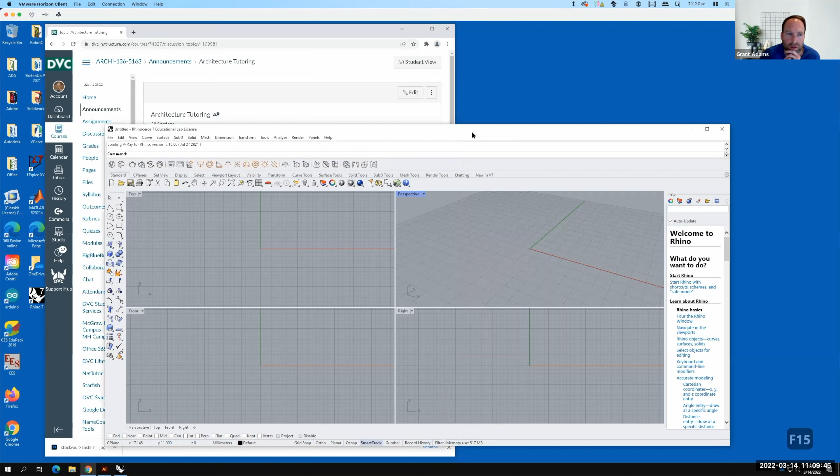Okay, so let's bring back up what we're working on today, which is 213. And this is very much finishing up what we started last class. When you're done with exercise 213, you're pretty darn close to being done with your assignment 202, which is awesome. So when you turn in your assignment 202, you're going to be turning in an AutoCAD DWG file as well as a screenshot showing your red and blue lines as part of that assignment. It should be separate, so you need to turn it in twice, essentially. You're going to have those things at the end of exercise 213, but you can then use those again for your assignment, assuming that everything worked correctly and that you finished it.

So let's start from the very beginning. Let's go all the way back into SketchUp. I'm not asking you guys to go all the way back into SketchUp. I'm doing this just for the sake of this is the whole process. So I'm gluing it all together. I'll probably cut through a few phases by opening new files so that you don't have to watch me do all the steps. But I would start by opening up SketchUp. So let's get down here into SketchUp.

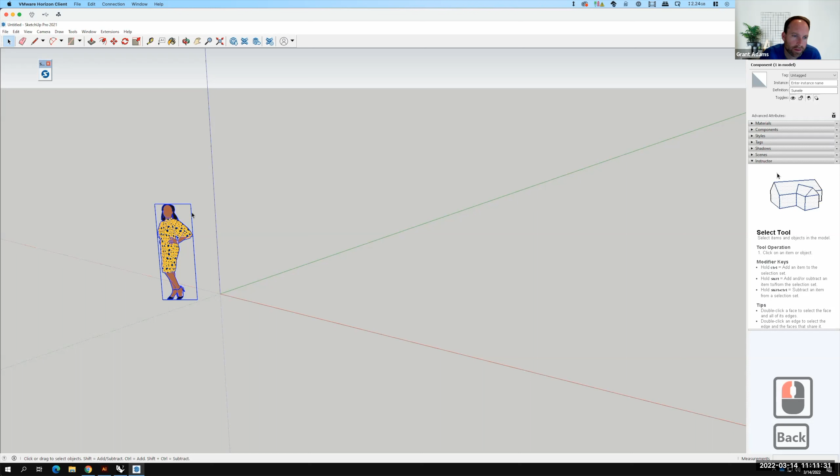And I'm going to agree to this. And we'll pick the architectural inches template. And there we are. I'm going to go ahead and delete the figure. We don't need that. And then I'm going to open up the geolocation. When I do this, it's going to ask me to log in. So I have to go in to sign in for a second. And I have to get passwords and stuff. So bear with me. Probably should have already done this.

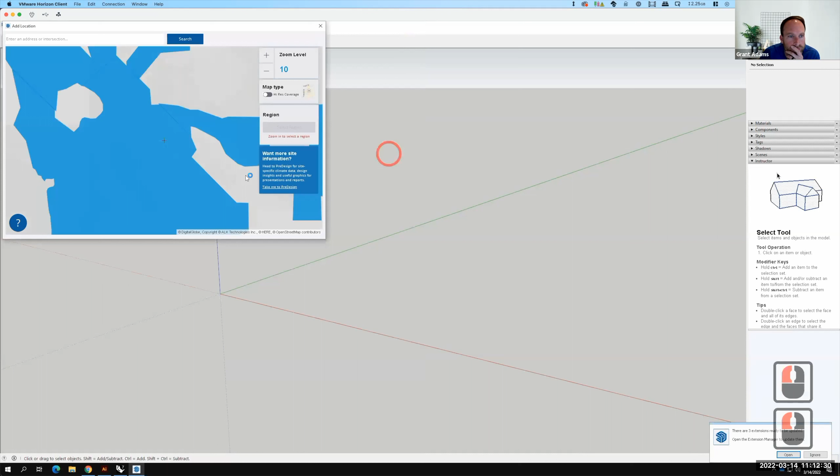All right, so I'm going to sign in with Google here. Oh, I have to accept my cookies first. All right, perfect. So now I can bring in the add location. Let's go to next here, next.

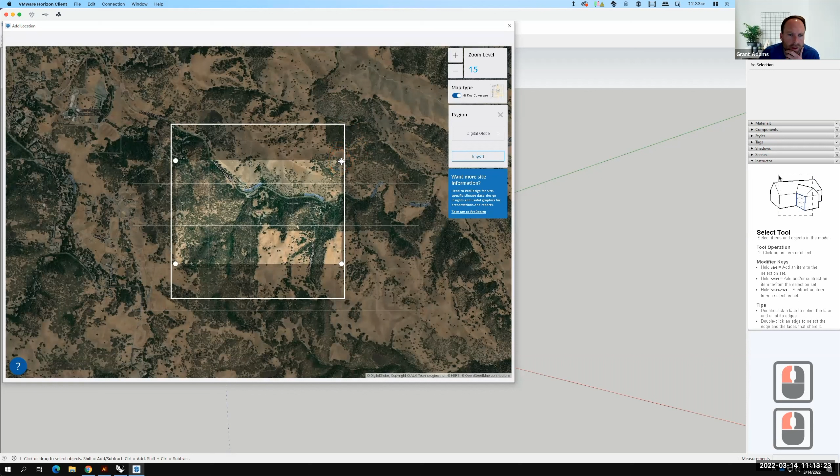Okay, so I need to start with a location. So let's see here. Maybe we can zoom in on Mount Diablo and get something from Mount Diablo here. Well, here, we'll zoom in. Remember, once I get that box, I'll be able to take a piece of terrain. So I'll go ahead and click on select region. And we're just going to use Digital Globe here. I'll select the area that I want to capture, and I'll click on import.

If I want to see that, I can go to File, Geolocation, and I can click on Show Terrain, and I should get my terrain. There it is. So I can take this terrain and I'm going to save it. I'll go to File and then Save As, and I need to back save it a few versions. So we're going to go back to SketchUp 2018, and I would put this into today's folder. This is... helps if I could type here.

And I'll click Save. And now it's saved my SketchUp file. So I can go ahead and close SketchUp. I don't need that anymore. And I'm going to bring it straight into Rhino. So I'll go to File and then Import.

I do have to make sure that my model units are correct in Rhino. Right now they're in millimeters, so that's a problem. So let's go to my unit settings and let's change my units to inches, because I need those two to match. And then I can go ahead and go to File and then Import. And we're going to import that SketchUp file that we just saved. All those default options are just fine.

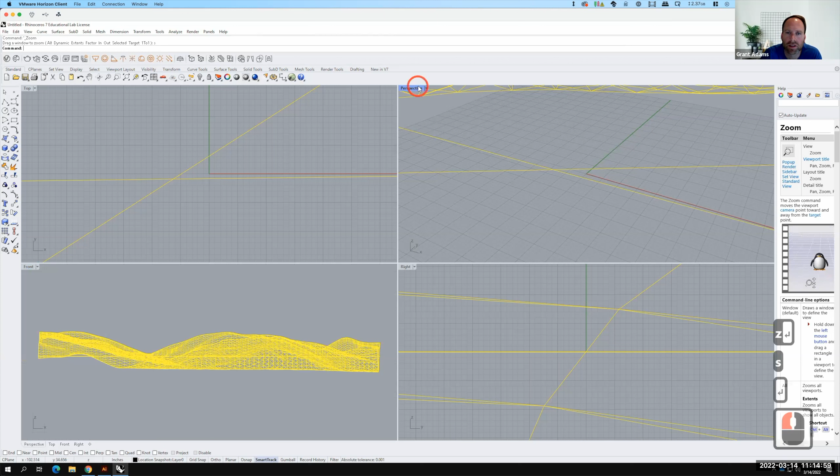Let's press Z, enter for zoom, followed by S, enter for selected. Let's do it in the perspective view here. And now we can see the whole piece. Let's do some organization. And again, I'm obviously moving a little bit faster through it this time because you've seen it twice. So I'm going to make a layer called SketchUp.

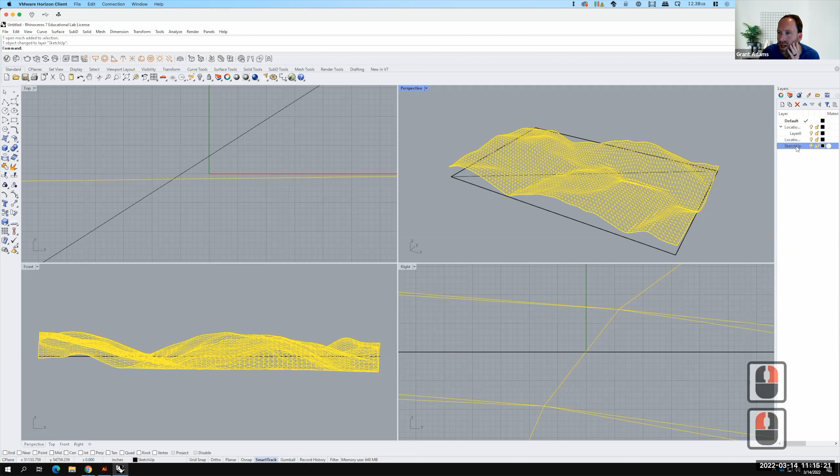And we'll take the terrain and we'll move it onto the SketchUp layer. So let me right click and say change object layer. And now that's on the SketchUp layer. We could turn it off and then we could delete the rest of the layers because we don't need any of those. So let's take those, we'll get rid of them. And we'll make the SketchUp layer active. And we could actually get rid of the default layer as well. So I now have just the mesh from SketchUp.

I'll double click on the perspective viewport to make it large. And now we need to contour this to convert this over into a NURBS surface. So I'm going to turn on my vertex snap. There it is. And I'll create a new layer for contour X. And I will then contour this mesh. So I'll type in contour or go up to Curve, Curve from Objects, Contour.

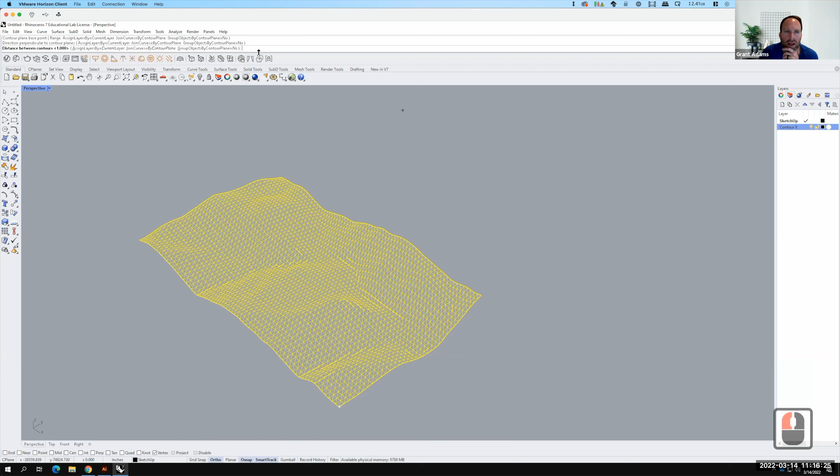I'll snap to this corner. Now I need to make sure I'm on axis. So let me turn on ortho. I'll make sure I'm on axis. I'm not snapping to anything. And we'll do my interval at 100 feet. And there it is. And that should be fairly close to what the grid is or the mesh is. Oh, I have to change those because I didn't have them on the correct layer. Let's change object layer so that they end up on the contour X layer.

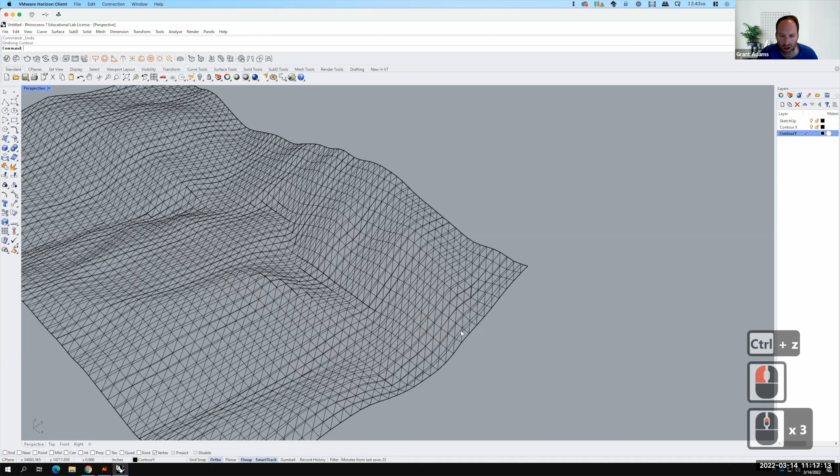Let's create another layer for contour Y. We'll make that active. And then I'll go up again to Curve, Curve from Objects, Contour. If I had done this, I'm going to end up with a bunch of points because I was contouring the lines, not the shape itself. So let me undo that, make sure I'm selected on the mesh, and then we'll repeat contour. So let me type in contour.

If I can type, there it is. And this is going to be contour in the Y. So we'll make sure we're not snapping to anything. 100 feet. And there it is. So I have contour X, contour Y. I'll turn off the SketchUp layer. And I'll look at this grid in the top view. So let me zoom selected.

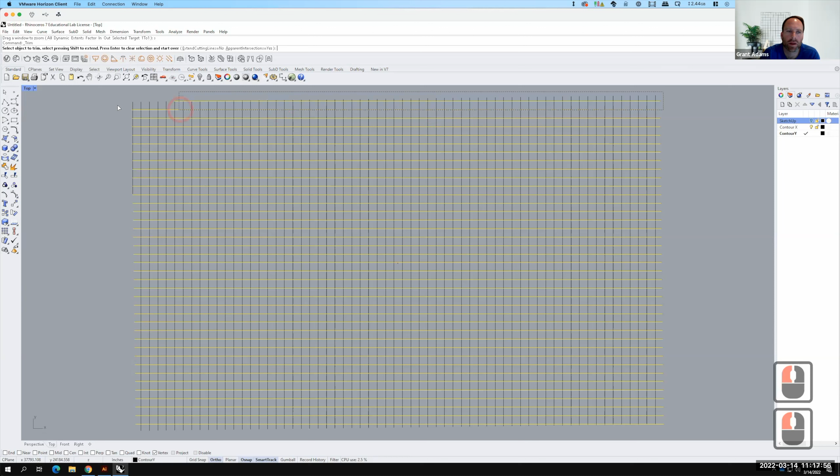We need to do some cleaning. So let's use the trim command. I'll go up to Edit and then Trim. We'll trim off all of that. Come down to the bottom and we'll trim off all of that. I'll hit enter to finish. Then I'm going to repeat the trim command for the sides, trim.

Trim that off. And then we'll trim, oops, all of this off. Perfect. So when I'm done, I should have this perfect little grid. So as I've done before, I'm going to make sure that I save this before I do my curve network. So I'll go to File and then Save. And this would go into today's folder, and we'll call this Marsh Creek. I'll go ahead and click on Save.

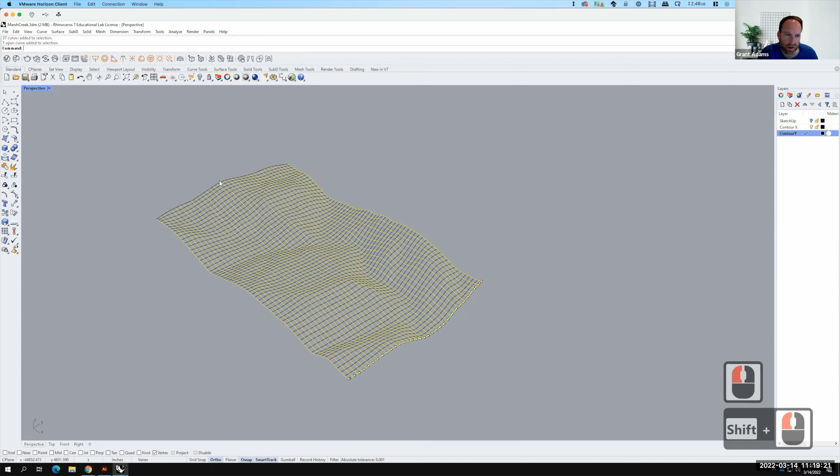And then I can do my curve network. So when I did the curve network, remember I had trouble when I did all of them. So I'll select all of the lines in one direction. Actually, let's do it with fewer. Let's select all of these. And then I'll select just the two ends. So we'll go there and we'll go there. And then we're going to do the network surface or the curve network. So it would be under Surface, Curve Network, or I could type in NetworkSrf into the command line.

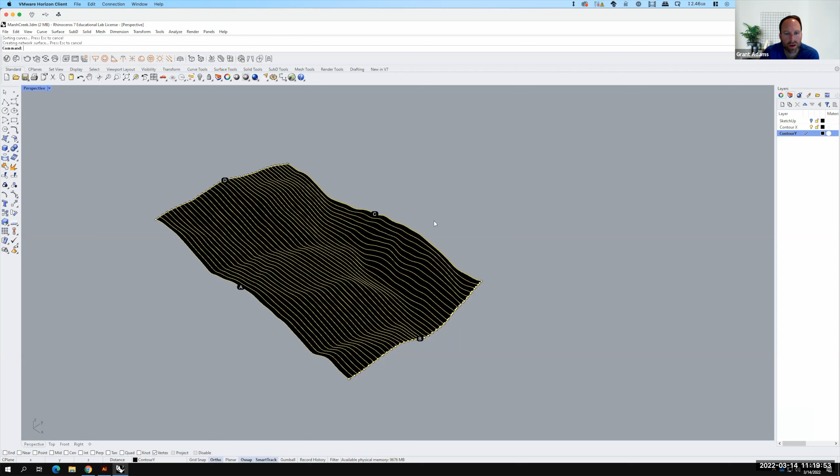It's going to give me my 4 points. Gives me a little preview. Pretty soon the dialog box should pop up here. And we'll go ahead and say OK. And this is going to take a little bit of time. While that's working, I'm going to go ahead and open up my file from last class, because once we get to the sides, I'm going to skip over. So let's go into here.

Perfect. I'm going to walk my way over into this file a little bit later. So I'm just getting that up and ready so that you won't have to watch me redo all the lines. So we'll leave that minimized for right now. It's still processing here. While that's happening, we'll start talking about the next phase because I want that to continue.

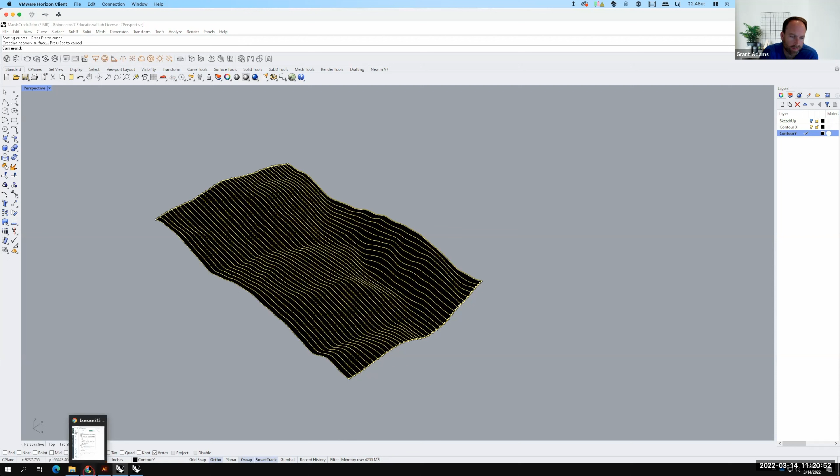So over here in our exercise 213 from last class, I had this chart right there. So this topography creation chart is beneficial for you because you can use it to determine scale and contour interval, etc. So as I talked about last class, we have over here our scale. So we have things like 1 to 200 scale, 1 to 100 scale, 1 to 50 scale. Those are all common scales at the site level. Down here, we have our architectural scales like 1/4 inch equals a foot or 1/8 inch equals a foot. Okay, so those are all allowing us to select the appropriate scale.

So the one that I did last time was 1 to 200 scale. So I'm looking at this third column down right there. And as I come across, it's going to tell me the size. And I told you that the model size that we're making is 11 by 17. So 11 inches by 17 inches at 1 to 200 scale ends up being 2,200 feet by 3,400 feet. So my overall size of this model is going to be 2,200 feet by 3,400 feet.

See if Rhino decided to catch up with me here. Good, it did. So let me rebuild this surface. And I'm going to rebuild at 100 by 100. And I'll go ahead and say, OK. As soon as I do that, this becomes a workable file again. Let's put that on its own layer called terrain.

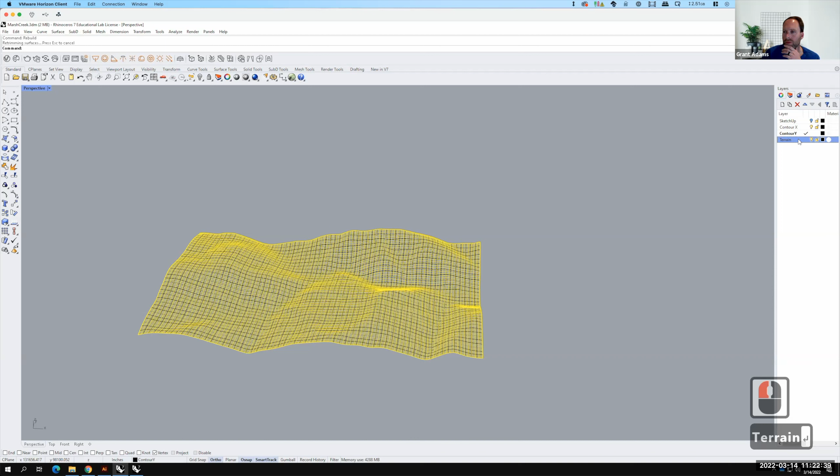I'm going to right click and say change object layer, make that active, and then I can actually turn off contour X and contour Y because I'm left with just this surface. If I switched into my shaded mode here, we could see a little bit more of what that surface looks like. So as I said before, when we look at this chart, if I'm working at 1 to 200 scale, my paper size would be 2,200 feet by 3,400 feet. If I was working at 1 to 250 scale, my paper size would be 2,750 feet by 4,250 feet. But we'll stick at 1 to 200, 2,200 by 3,400.

So the next thing I need to do is draw a rectangle that is at 3,400 feet, comma, 2,200 feet, enter. And so that rectangle right there is representative of that 11 by 17 inches at 1 to 200 scale. So let's look at it in the top view so we can try to figure out where it belongs on this. If I switch over into shaded mode, we can kind of get a sense for, I think that's actually Marsh Creek there. And we can actually move this around and decide what piece of the model we really want. So let's say we like that piece there.

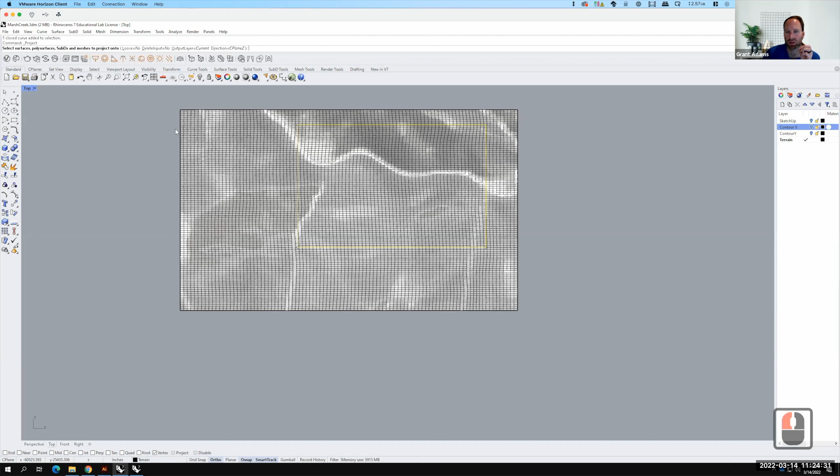Once I've done that, I'm going to use the project command, which we've used previously in this class, to project that rectangle onto the surface itself. So let me select the curve. I'm going to go up to project. So it's under curve, curve from objects, project. Alternatively, I could type in project. And it's going to ask me to select the surfaces or polysurfaces to project onto. I want to project onto this surface right here. And I'll go ahead and hit enter. And when I do that, it takes the rectangle and it projects it out on the surface, like that.

So at this point, I can go ahead and trim this big surface out. So I'll type in trim, or I can go up to edit and then trim, and I'll get rid of the extra part of the surface that we don't need. So I've gotten rid of that extra part of the surface, and there's the resulting piece of terrain that I'm going to work with. It's set up at 3,400 feet by 2,200 feet, which is what it should be set up at. And if we go back and we revisit this chart again, we've got 2,200 by 3,400.

The next thing that I need, and that's what all these columns are, is what is the thickness of the material that I'm going to make this physical model out of. And so I told you before that the model material that we would use, if we were using just standard cardboard, it appears to be 1/8 of an inch thick, but it's actually a little bit thicker than that. It's 5/32 of an inch. So if you were picking a material, you would actually measure it out. We're using 5/32, so I'm telling you that's what it is.

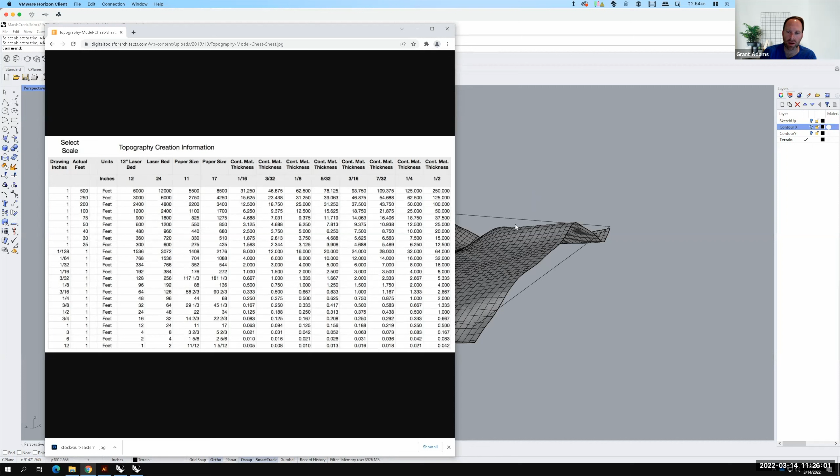And I would come down to my third row here, and at 1 to 200 scale, 5/32 of an inch is 31.25 feet. So that's going to be my contour interval of this piece of terrain. So I'll go ahead and do a contour of this piece of terrain. Let's go ahead and create a new layer. We can call this topo lines.

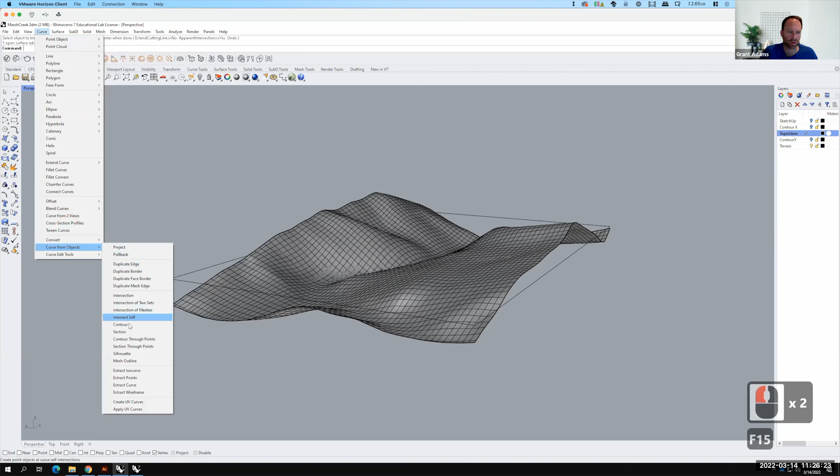We'll make it active. And then we'll go ahead and contour this. So I'll go up to Curve, Curve from Objects, Contour. I'll select this as my object. I'll press enter. I'll pick this corner. Now I need to turn on my endpoint snap to pick that corner. It doesn't matter actually which corner you pick.

And I need my contour not to go in the X direction, not to go in the Y direction, but to go straight up in the Z direction. So to do that, I will double click on the perspective view and then look in either the front view or the right side view. It doesn't matter which one, because in either case, I'll be able to get it to go straight up and down. So there it is along the Z axis.

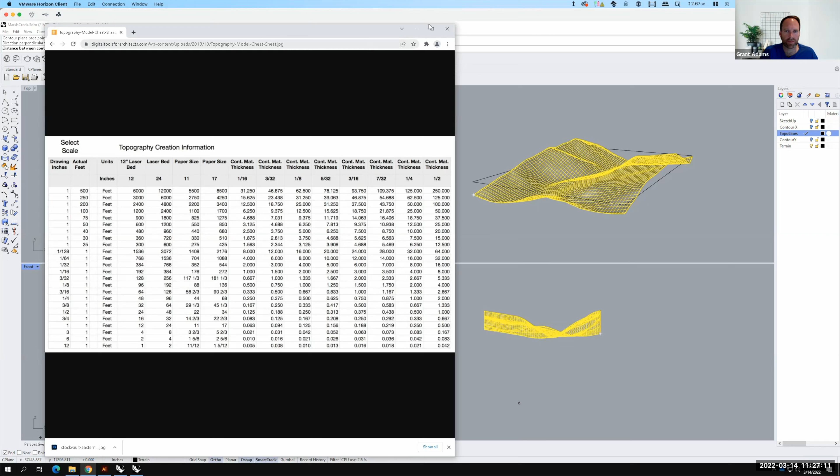And now my distance is that number that we had right here. So we'd come over here and double check 31.25 feet. So let's get back to Rhino, and we'll type 31.25 feet, and I'll hit enter. And that then builds out the topo lines for this particular piece of terrain. So there it is.

Now, once we've gotten to this stage, we can actually turn off the terrain altogether, and we're left with just our topo lines. And now it's time to draw those steps on each side that work our way up. So as I showed you last class, there's two real methods for doing this. The first method would be to create points on all of these endpoints and then rotate those points. So let's do that method.

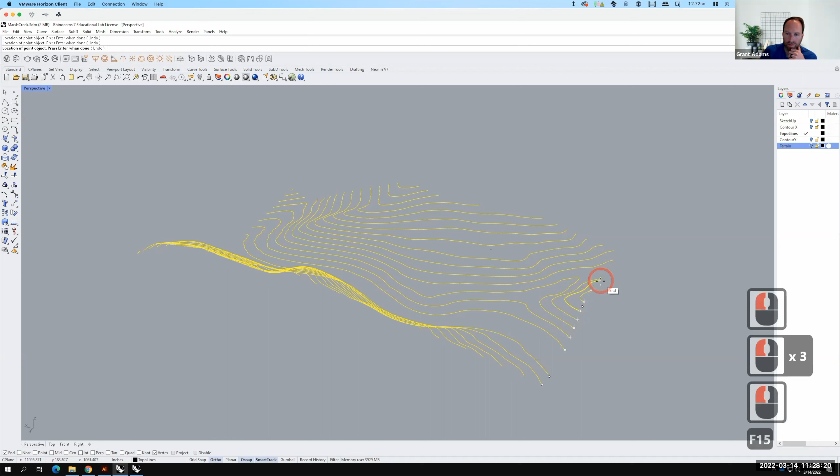I'll use my single point tool. Actually, I want to click underneath and use the multi-point, this one. I'll make sure my endpoint snap is checked, and then I'll go ahead and create a point on the end of every one of those lines. So I have a point on all the lines. I now want to select all of those points. So I could drag a box to select those points. Alternatively, I could also type SELPT for select point, and it will select all the points for me, which is a little bit easier.

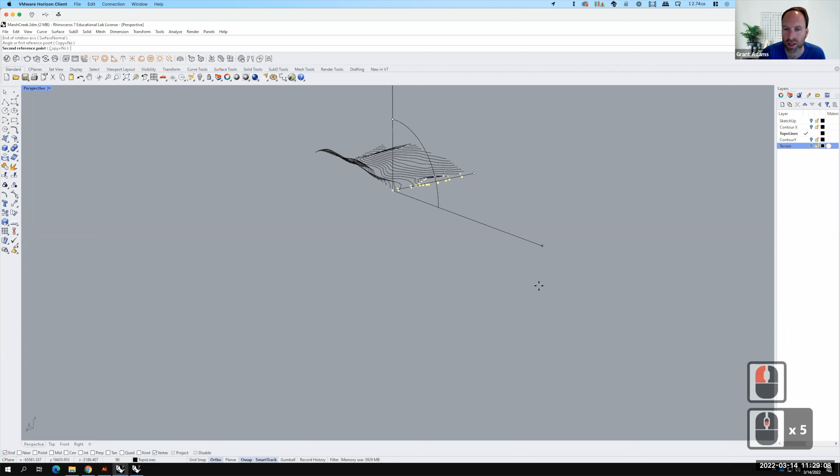Let's rotate that. I'll use the Rotate 3D command. I'll go up to Transform, Rotate 3D. I'll snap to this first point. We'll go off right along that y-axis. Then I'll go straight up and down from the z-axis, and I will fold those points flat. So there they are. Once I have those points folded flat, now it's a matter of connecting the sides.

So I'll start here. We'll come over. Remember, I want to be in line. I'll hover. Let me turn on my point snap here. I'll hover over that point. We'll come there. I need to turn on perpendicular. And there it is. Come over. This one's straight across because it's at the bottom. I'm going to come up. Sometimes you have to orbit around because I've got lines in the way here. There's my perpendicular. There it is.

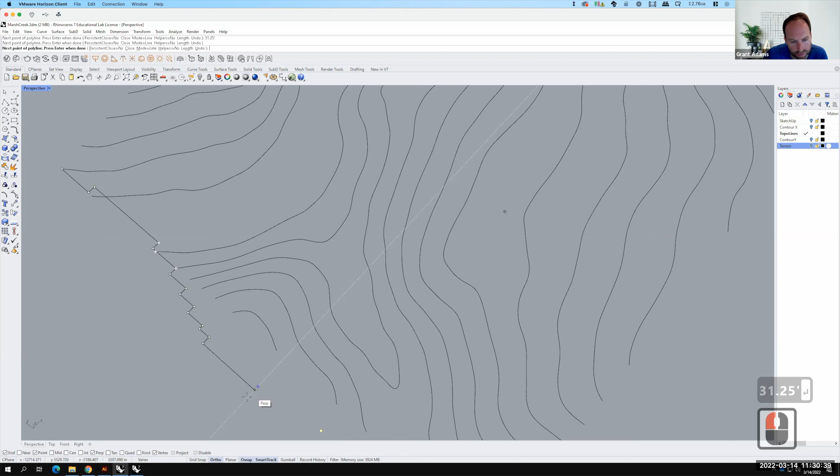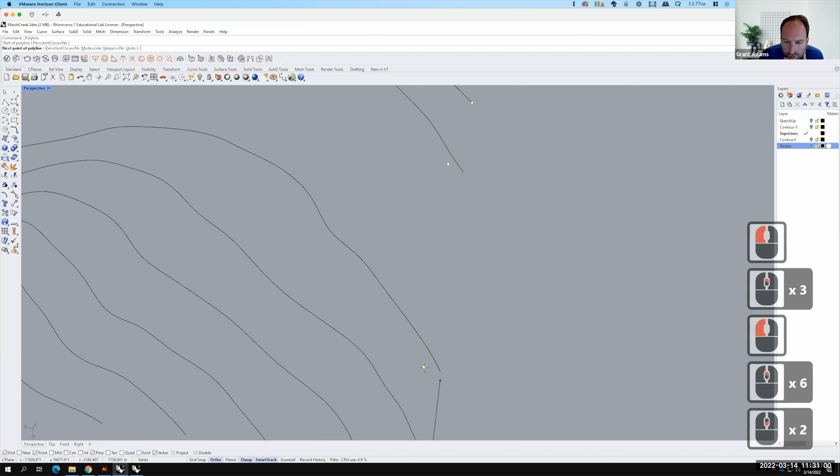So that's at the top of the hill. So in this scenario, because of how I drew it, I need to actually go up 31.25 feet. I need to come over. Oh, that doesn't look right. Sometimes these don't quite look correct. Yep, I made a mistake. Try that one more time. There. There's perpendicular. There's perpendicular. Sometimes it's just about the position that you have your view in, so you can see this really easily.

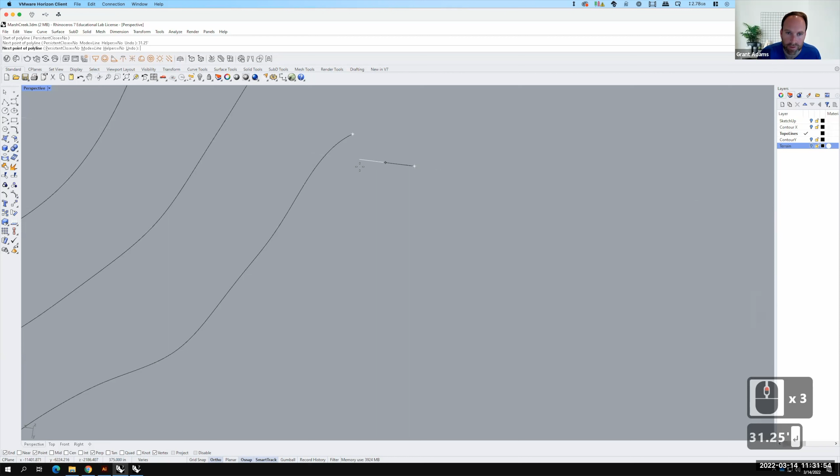Something's wrong with that point. I created an extra point. Well, neither of those look right. So I'm going to have to go back and see what happened on those points. I'm just going to end that one there. And then we'll work our way through the rest of these. So this one goes down 31.25. We'll come across. And so that's a good point.

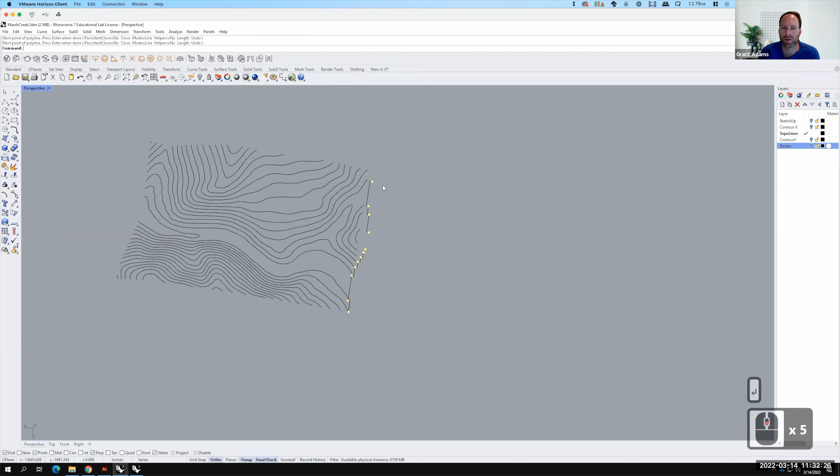I'm reading my chat. Hold on. Okay, Angie's saying she finds the point rotate process harder. I agree with you. I always do the other one. Some people conceptually struggle with the, yeah, I'm gonna just end that one there. Some people can struggle with the change the C-plane, the drawing plane. I have a hard time with this one too.

So let me select those lines there and there. Let me Rotate 3D. And the nice thing about this is once we rotate 3D on this, there to there, you can see what happened and how we got messed up. So from here, this really should have gone straight across to that point, and then it would need to go down to the next point. Looks like I had an extra point there. That was where I got messed up.

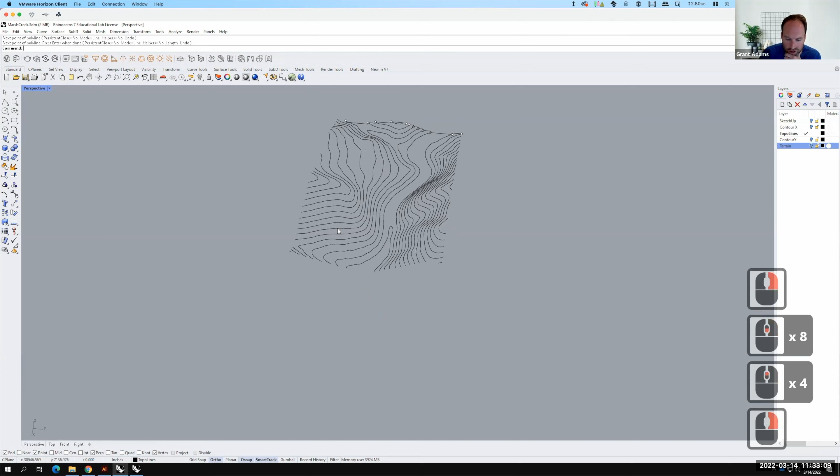So let's talk about that C-plane method right here. Okay, so this is good. Brooke, you have a good question in this. So this is like yours, where we're coming down to the bottom of a valley right here. So how do we know where that bottom is? Well, if we switch our C-plane, so let's go to Set CPlane 3 Points.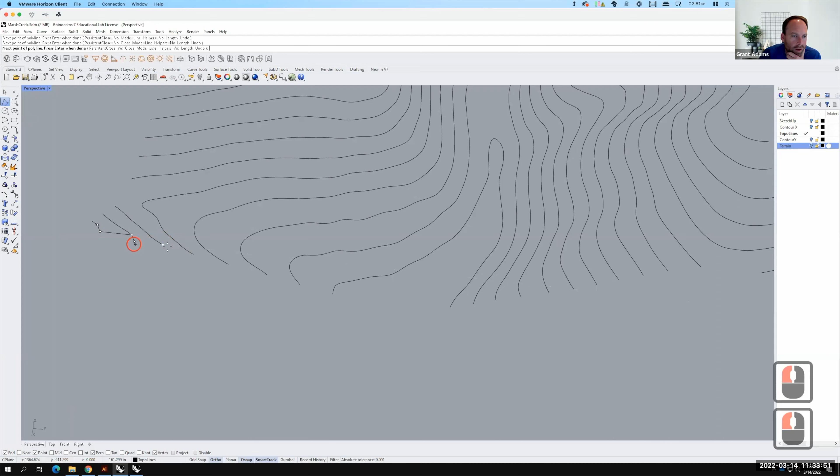Let's start up here. We want to go straight over in the Y direction. We want to go straight up and down. There it is. Now I can draw in this plane. And when I get to the bottom, so let's start right here and work our way over. We know what my contour interval is.

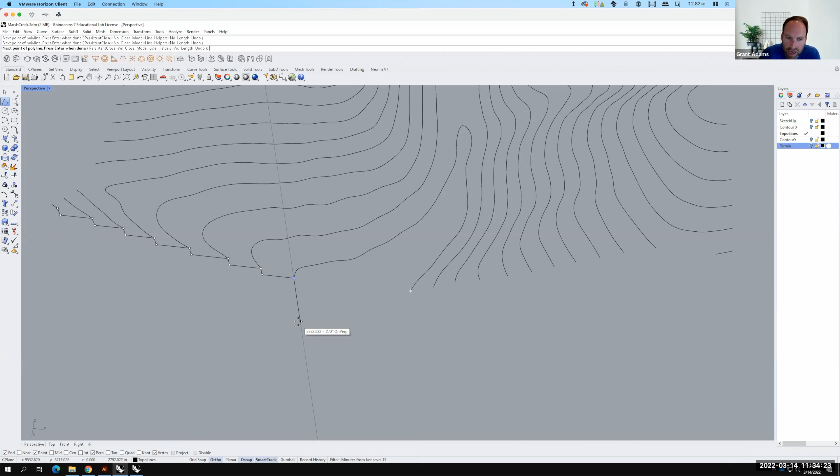So remember, if this were being set up with cardboard, my lowest layer would be at whatever the thickness of the cardboard was. Oops. So I've got myself to right here. Now I'm in the bottom of the trough. So these two are straight across, but I know that this piece of cardboard would go down the thickness of the cardboard. So it would be 31.25 feet. So whatever my interval is, and apparently I can't draw here, 31.25 feet. There it is, straight down.

I'd come over, and then I'd start going back up this side. The opposite of that is at the top of one of these, at the top of a hill, you would just go straight across. So I'd work my way back up this side, creating every one of these steps. Like this. Oops. Okay, so you guys get that idea. We've gone through the set C-plane. I also find that to be the easiest method.

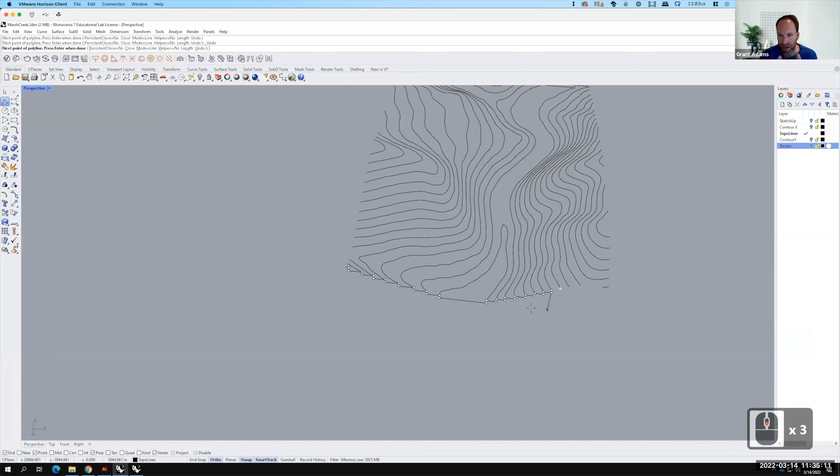Okay, so now that I've done the C-plane, I'm going to go ahead and flip over to the one from last class, so you don't have to watch me do all of the steps, because I finished all of the steps on this one, except I haven't finished the corners just yet. So we have to look at this, and I think imagining that this looks like little layers of cardboard sometimes can be helpful. So each of these is the top edge of a piece of cardboard. So there's the top edge, and the cardboard would be sticking down below it, which is why at the bottom here, we go down, over, and back up.

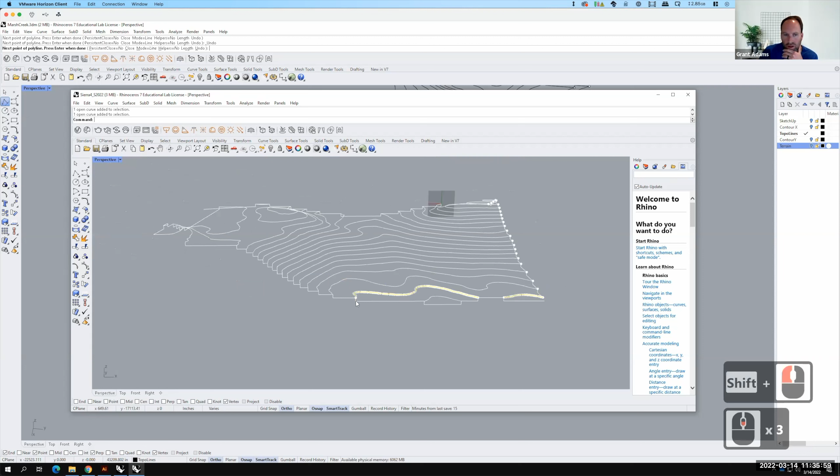At the top of the piece of cardboard, again, there's that edge of the cardboard. That matches up with this edge of the cardboard. It's just clipped. So that ends up being straight across. And then these stairs all seem to make sense. So let's look at the corners specifically. So in this case, I've got this edge of the cardboard coming to meet that. This needs to then go straight down by the distance of my contour interval. So we'd come down from right there.

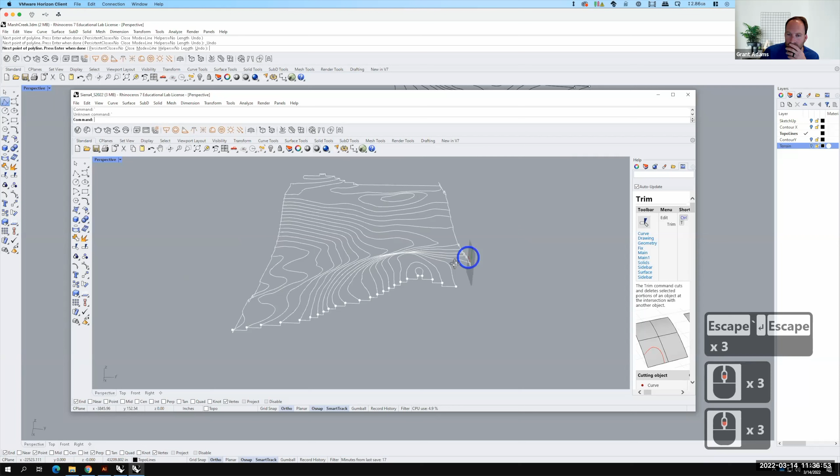Oops, let me turn on end snap. From right there, I would need to go down the 31.25 feet. And there it is. In this context, I'm lucky because this meets that. And so I can just trim it off. So I could type trim, and I could get rid of that little piece there, and those meet perfectly at a corner. That doesn't always happen. So in this scenario, it did, but some of these other corners, they won't meet. So let's look at this corner.

So I have my steps coming up this side. I need to have a line that continues over here. So let's take a line here. Let's start at this point, and let's continue. And I usually let them run wild at the end. Now this is the next level up. So here's one level, here's the next level up. So this would need to come down the 31.25 feet and then go over to meet this line. So I can start right here, snap down 31.25. There it is, down. And then it needs to come over to this line.

Now I'm in the C-plane where I'm only allowed to draw vertically and along the left and right here. However, if I turn on my perpendicular snap, I can snap to perpendicular along that line. There it is. So I can take the point from here, perpendicular to that line, and then I can trim it. I'll take this piece, trim, and trim that off. So the steps come and then they wrap around this corner.

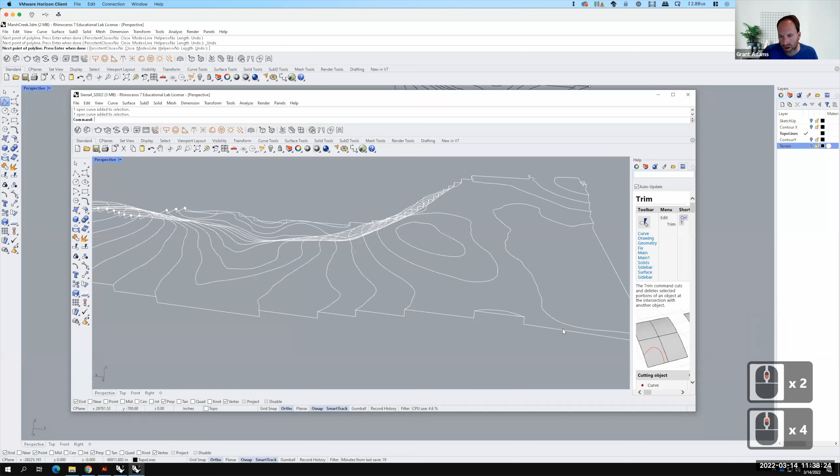So let's work our way along here. We're stepping down. We get to the valley. We go down, over, and back up because this level here is the same as that level there. We work our way up. Here's a top where we come up, over, and back down. Let's look at this corner. So like I did before, I left this one long.

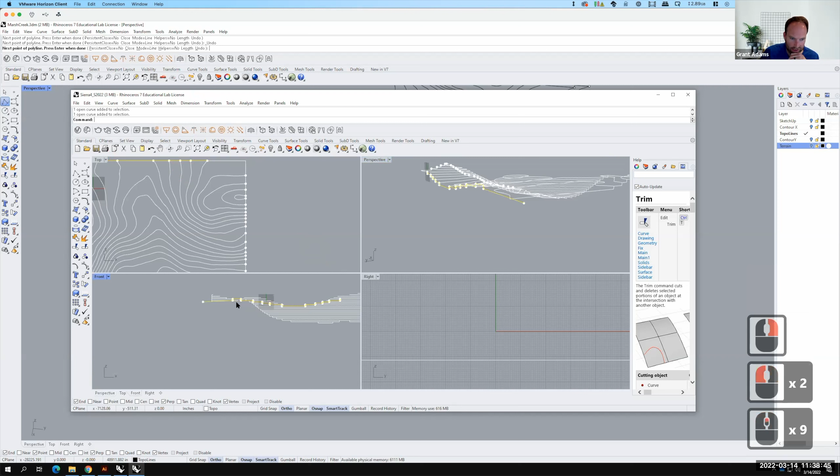Oh, it's actually not correct. You can see that it's on an angle. Sometimes it's even easier to see it if you look at it in the side view. So I messed that up when I created it. See how it's going down on the slant there? We want that line to be going straight. So I would come back to this point and I would need a new line that's going perfectly straight. There it is, going straight.

Now, this diagonal line is part of this whole line. The last thing I want to do is select it and say, oh, well, let's just delete it. Well, then I lost all my steps. I don't want to have that happen. So what I'm going to do is when it's selected, I'm going to go up to edit and then choose to explode it. So I go to edit and explode, and that breaks all of these into individual segments.

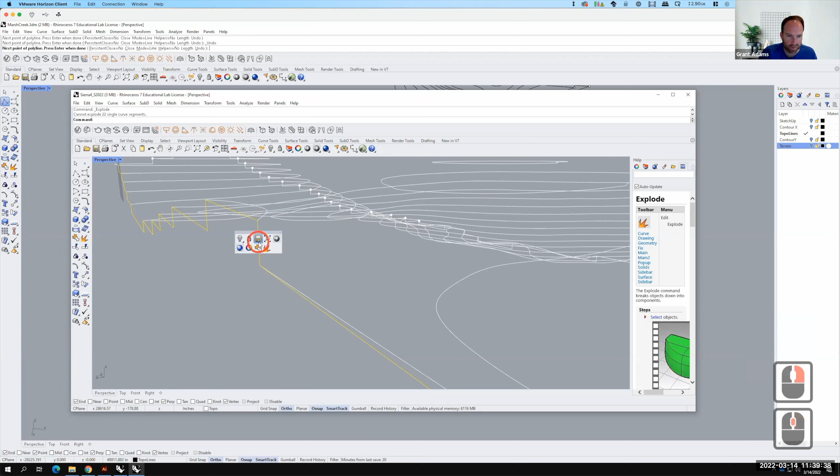I'll then hold down the control key and deselect that line, I hope, which of course is not working Mac to PC. It's killing me. Okay, so in that scenario, I'm going to have to deselect everything. You could just hold down the control key, deselect it, and then you can join it back together after you've deselected that. I don't get to do that. I'm going to press delete to get rid of that diagonal.

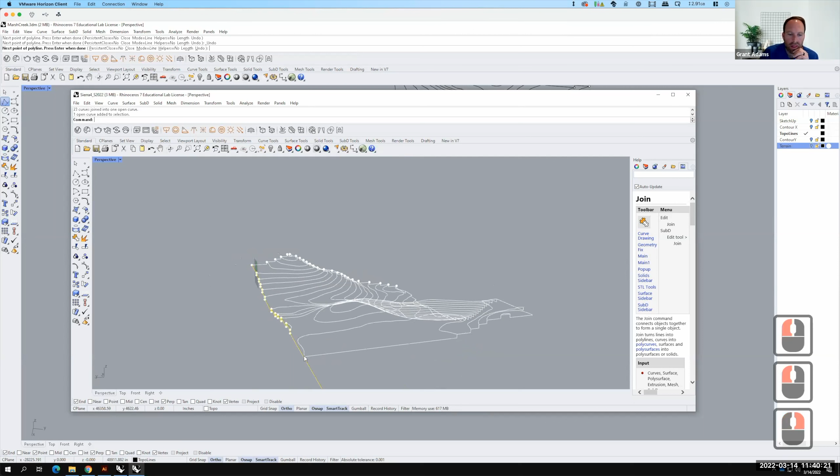Then I will take this line and all those other lines along here. And if you get this lined up correctly, it's not too hard. And I will join all of those back together. I'm going to go to edit and then join. And now those are all joined back together. So I have that set of lines. Then I'm going to go ahead and look at this corner again a little bit more carefully.

So right there is the end of the next run, but I need to go from this step over to meet that line at perpendicular. So let me go ahead and select this and press trim. And there we go. I've trimmed that off to make that corner. And let's look at this corner.

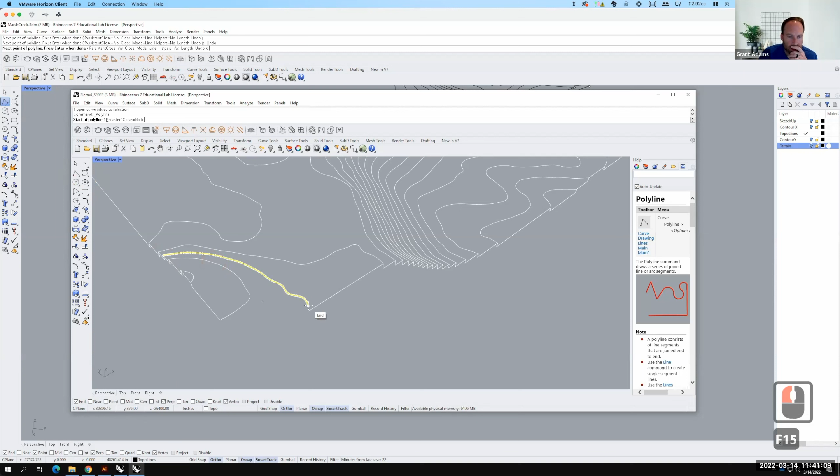So this line right here comes around to there, which means that it needs to go straight back like that. So I'll click on this. I'll snap to the end here, and I'll let that one run long. So this is now part of this line. So I could actually join those together. I can go to edit and then join like that.

This is the next step. So I would need to go down and then over to meet this. So I'll start with a polyline at that endpoint. I'll go down by 31.25 feet. And then we'll come over and snap to perpendicular. There's my perpendicular point. And now I can go ahead and trim off this piece. So let's take this line as our trim. I'll type trim or go to edit trim, and I can get rid of that piece as well.

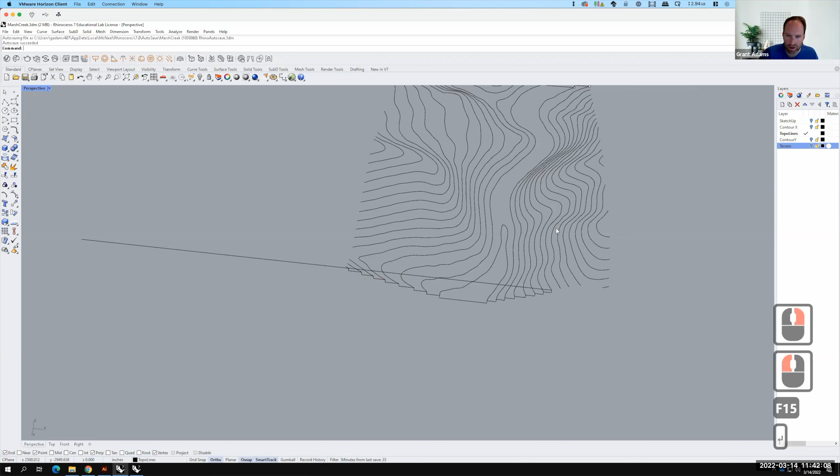So I've worked my way around the whole model, and I've seen that everything seems to be going the way it should. Now, sometimes in a model, you end up with, I'm jumping back here for a second, where you have a mistake. Like these steps are higher, and they should actually be down. Right? See how this bottom should have gone down? I started in the wrong place. So in that scenario, I want to go ahead and move these down so that the valley's in the right spot.

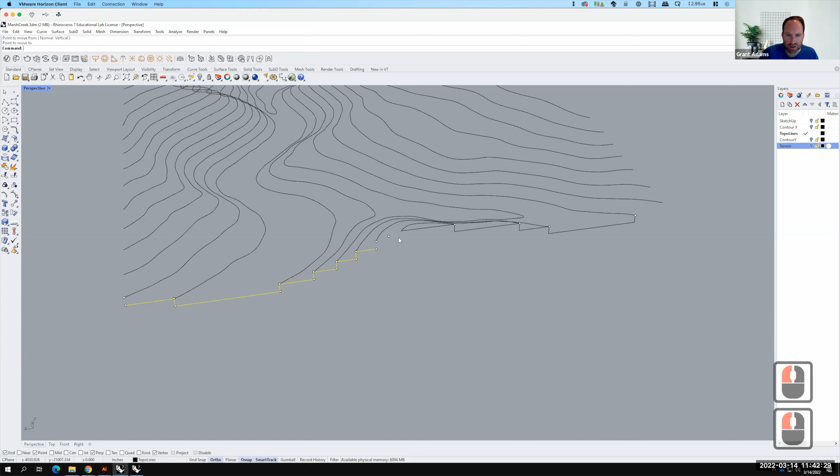And now when I'm coming back up, I could connect that, come over and connect that. My C-plane was already in the right plane to draw that. And now the steps work. So sometimes you just run into a problem of how you created it, and you have to go back and modify that. So let's get back to this finished one.

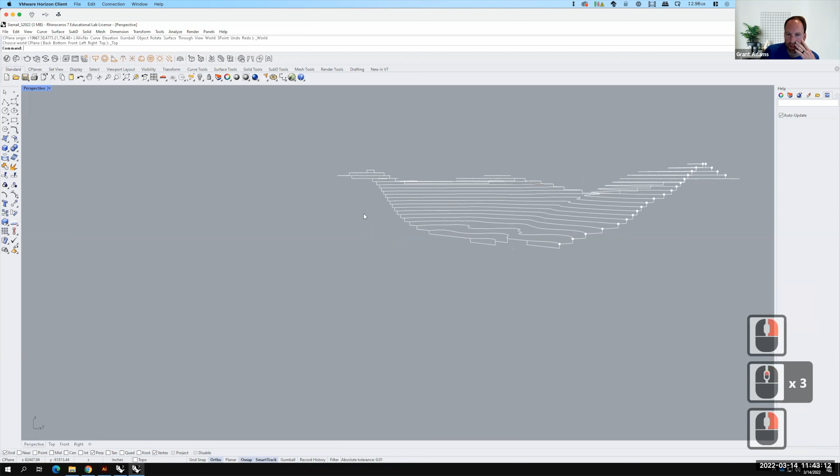Okay, I'm going to reset my C-plane. I'll go here, I'll go to set C-plane, world top. That resets everything back. And now I need to start to conceive of this as a model where I have sides on it. So my low point is way down here. And so when I draw the side, I want to make sure that I'm low enough to clear that point. Usually you want to clear it by at least the thickness of the cardboard.

So what I can do is I can reset my C-plane. I'll go to the down facing arrow. I'll go to set C-plane, and we'll do 3 points. Alternatively, I could just draw this in the other view, and I'll show you both methods here. If I do the C-plane, we want to go off along the x-axis here. And we'll go straight up and down. There's my C-plane.

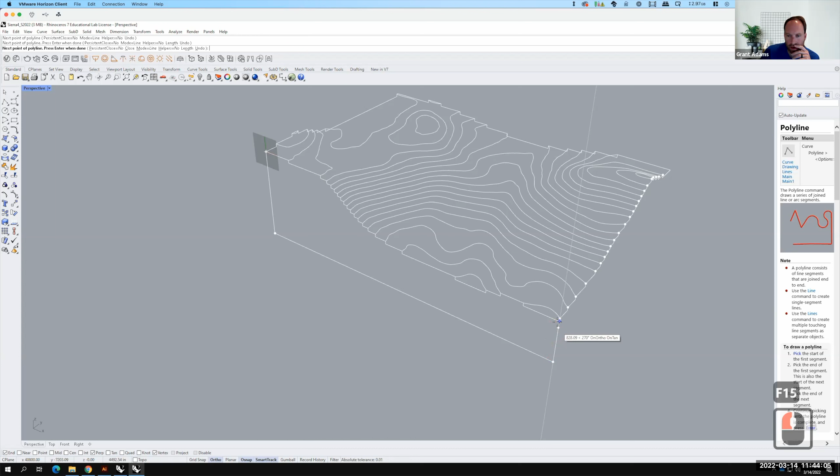And now I would draw the side. I would come down here further down than where that point is. Then I would come across till I lined up with that corner. I want to make sure it's perpendicular, and then I would come back up. Now that's much, much deeper than it needed to be. So I could cut off a lot of cardboard. Let's say I came up here, turn on my midpoint snap.

I could come up maybe to there. I could take that and trim it and get rid of everything underneath. So there's nothing wrong with that as a method. However, I could have, let me delete this for a second.

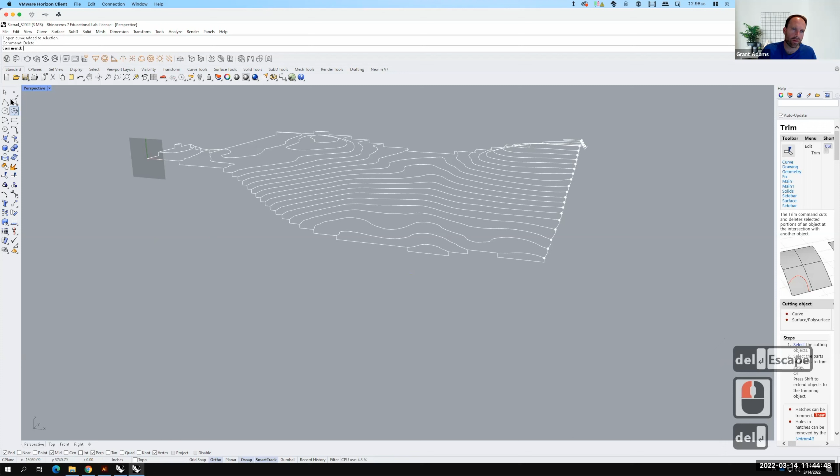I could have started my line right here without changing the C-plane and then jumped over into either the front or right side view. And by doing that, I can actually kind of see how deep I want this to be. So I can see where my drawing is, like there, for example. I can say, okay, well, that's right at that level. So I want to go a little bit deeper, maybe about there.

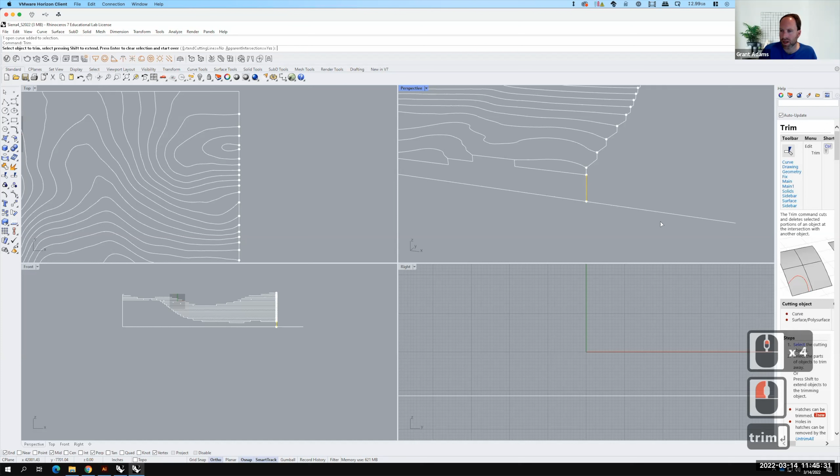And then I can come over. I could just leave that long. And I could come back to this point, come down, snap to perpendicular, and then I could trim this off. So we'll use this as a trim for that piece right there. Sorry, I had to press enter once. And there it is.

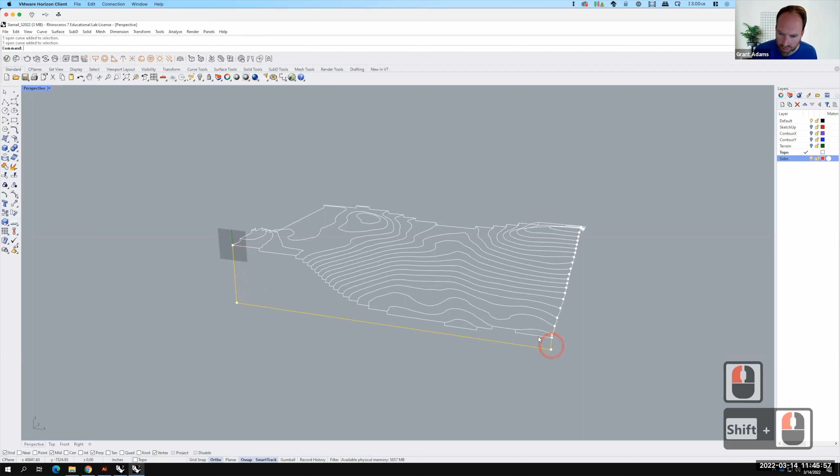So when I start to create these sides, sometimes people find it helpful to actually create layers for each side, just so you can kind of see it. I usually just have a layer called sides. And let's make that a color so it's a little bit easier to see. And what I want to do is I want to take this side plus this little piece here plus this side all the way along, and I want to join that together. So I'll type in join. Notice that it says 3 curves joined into 1 closed curve. That's what I'm after. And I'll right click and say change object layer, and it's now on the sides layer.

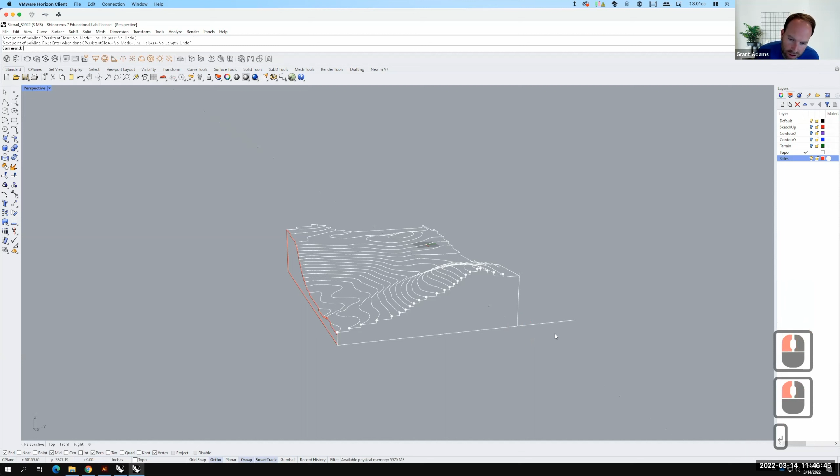Now I have to create the other sides. Now for this side, I actually need to start all the way right to there, and we'll come down. And this would be helpful if I had reset my C-plane. So let's go back to set C-plane. We'll go to world top. And now we can just go off along the y-axis here. There it is. We'll come to this corner and we'll come down, again, snapping to perpendicular. And so let's trim that. Get rid of that extra piece.

And I can then take this curve plus this curve plus all of those steps, and I can join those together. So I'll type join, and then I'll right click on the sides here and say change object layer. And now those are joined together. So you see I'm working through this. Let's just go ahead and jump to the sides layer. That'll save us a little bit of time.

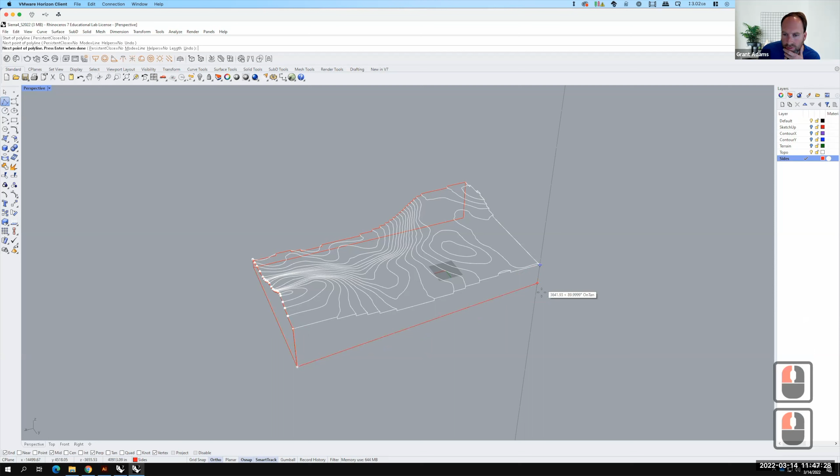We'll start right there, come down to here, we'll go across. Oops, we can just leave it long. We'll find this corner right there, and we'll come down to perpendicular. There's perpendicular. We'll trim. There it is. Then we need to join those together. So I'm going to select that plus my pieces there. We'll join those. Let's take that, put it on the sides layer, change object layer.

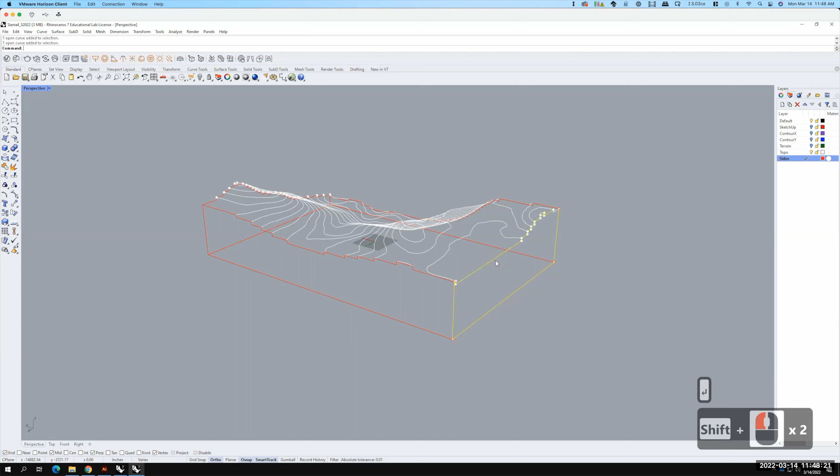And then the last one, down, over. I just want to double check. Yes. To go down on the edges, that's 31.25, right? For the corner. If your scale is the 1 to 200, which is what I did. If your scale was something else, then it wouldn't be that anymore. It would be something different. Okay, cool. Yeah. So let me join those together.

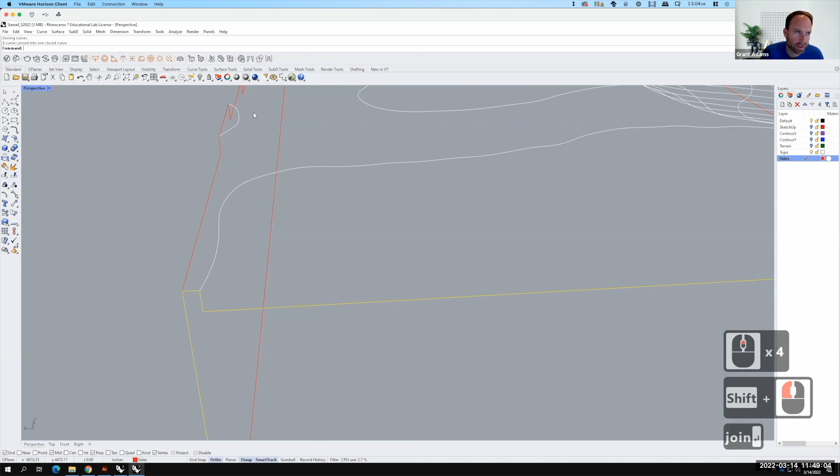Unable to join curves. What did I do wrong? Okay, that's good. Take this. Just little pieces. All right, one closed curve. So now what I end up with is I end up with all 4 sides created and on the sides layer.

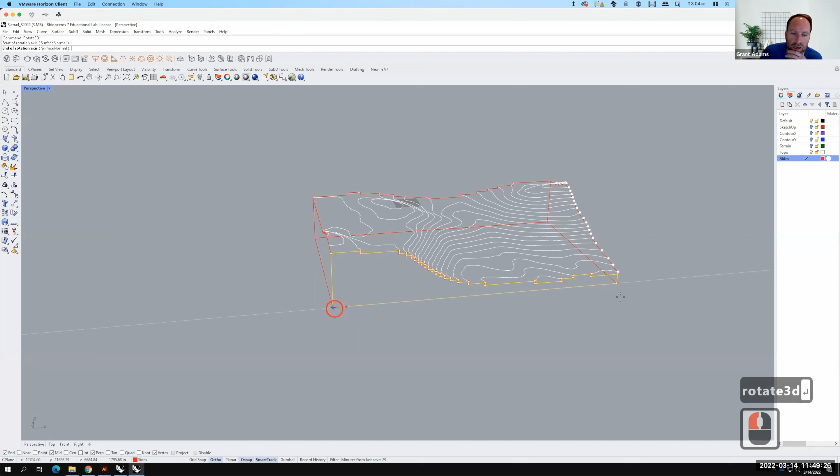So let's fold each of those down flat. So I'll use the rotate 3D command. So I'll type in rotate 3D, otherwise I could go up to transform, rotate 3D. I'll use the bases of each of these as my rotation axis, and I'll fold them down. So there's my first one. Let's take this one here. We'll repeat the rotate 3D. And we'll go from vertical to flat.

Next one here, repeat. I'm just right clicking to repeat. Vertical to flat. And the last one, right click to repeat here. And now that's folded flat. So if we were looking at this in the top view, you'd see all 4 of the sides laid out flat. That's perfect.

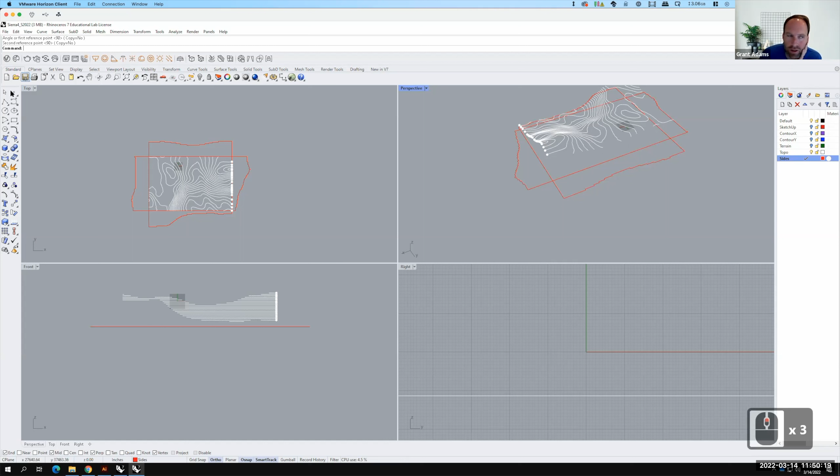Next piece that we need is we need to project all of these lines flat as well. So let's go ahead and create a new layer, and we'll call this laser cut. Let's make that active. And on that layer, I'm going to create a new surface that's larger than all of my objects. Something like that. Then I'm going to select all of the terrain. Actually, don't need the points. So let me do it this way.

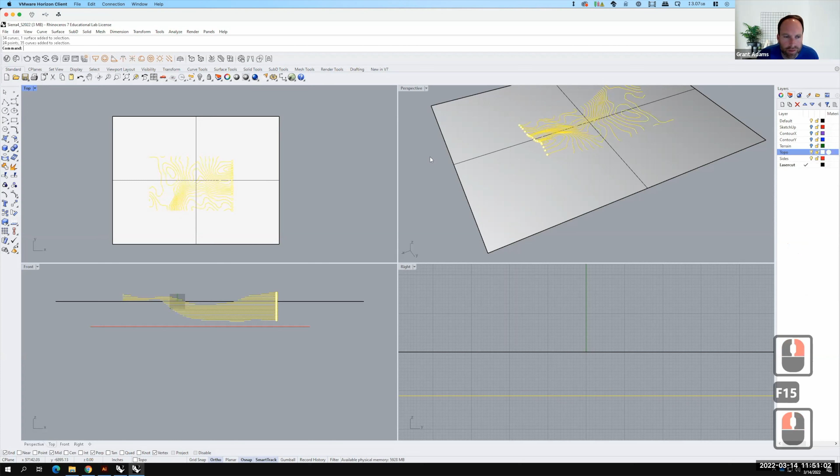Let me right click on topo and say select objects. There we go. Yeah, I still have these points. Let me get rid of the points. So I'm going to type SELPT to select the points, and then I'm just going to delete those. There we go. Now let's select topo lines.

And in the top view, like we did before, I'm going to project those lines onto this flat surface. So I'm going to type in project, and I'm going to project them onto this surface, and I'll hit enter. And those should now be on the laser cut layer. So I can go ahead and delete this surface, and I'm left with, if I turned off the other layers, right, those lines that are flat right there.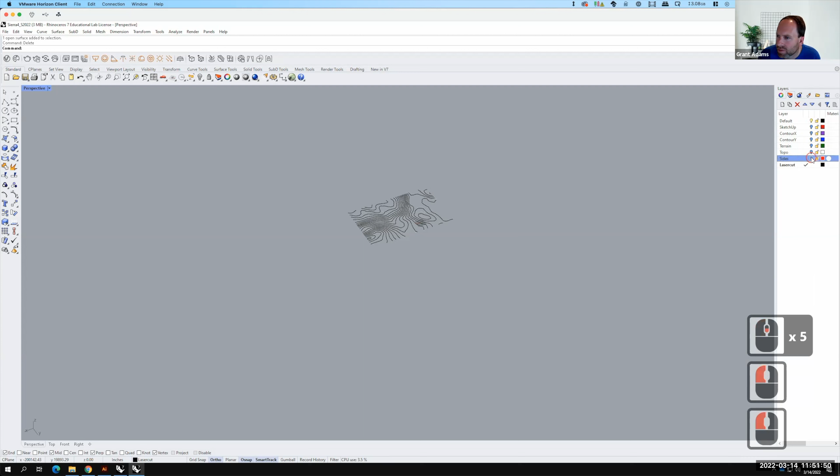Let's turn back on my sides. Let's take those sides and put them on the laser cut layer as well. I'll right click and say change object layer. Okay, now those are on the laser cut layer as well. We can turn off the sides layer. And so now we have to start prepping this file for an actual laser cut. So let's go ahead and give myself a border around my objects, because I'm going to end up needing that. And then we can pretty much move only into the top view. So there's my top view.

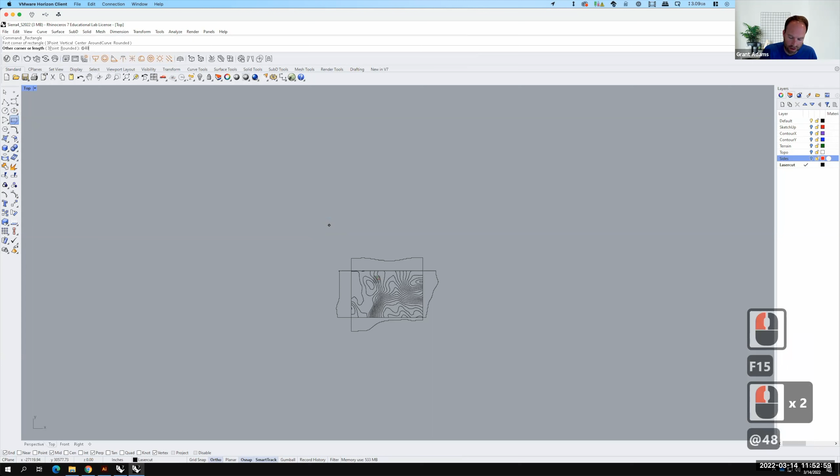So when I start to prep these for laser cutting, something that I need to know is that the bed size of the laser cutter that we have at DVC is 12 by 24. So I like to give myself a border here, and we'll say at 24, 12, except that that's really, really small right now. So I would either need to go back to my reference file here and say, what is 12 by 24 at 1 to 200 scale? It looks like it's 2400 by 4800 feet. So I'd have to do it like that, where I create this and say at 4800 feet, 2400 feet. That would be the size of the laser cutter bed.

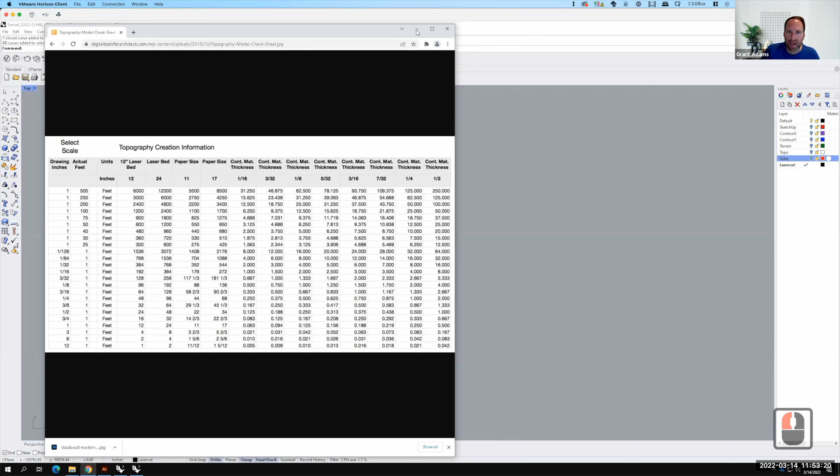Or I could actually scale this whole thing down. And that's really where we're going with it. So if I took everything and I wanted to scale this down so that it's now at 1 to 200 scale, all I need is one of these sides to do it. So I'll select everything. I'm going to go to scale. This is a regular scale, right? So it's not a scale 1D. And I'll say that this side from here to there should be 17 inches.

So when I do this and I type 17 inches and I hit enter, everything disappears. And that's because it got so small. Remember, it used to be 3,400 feet. Now it's only 17 inches. So while it's still selected, I'll type Z for zoom, followed by S for selected. And now my objects appear, but they're much, much smaller than they were. This is now 12 by 24. So now I can start working in those terms. So once again, I could say this is at 24 inches, comma 12 inches, and there's my laser cutter.

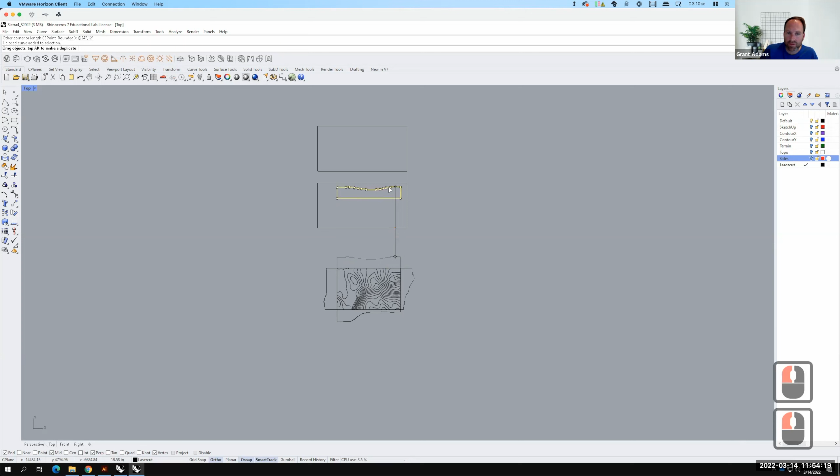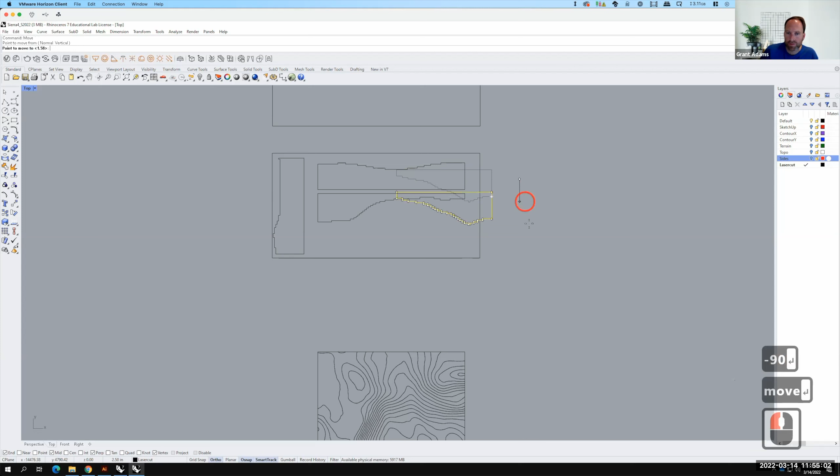So each of these sides needs to fit on here. You can feel free to rotate these, but you can't mirror them because they'll turn out wrong. So I want to take each of these and move them onto the laser cutter bed. Let's take this piece here. Let's move it. And let's move it over a little bit more. And this piece I'm actually going to rotate. Remember, no flipping, but rotating is okay. So let's rotate it from there, -90. Let's move it. All right, and so all of those fall on the laser cutter bed.

This is my terrain. So I need two versions of this. And that's because when we create this, and if you watch the video that I have of this being modeled, it'll make a lot more sense. What we do is kind of like shuffling a deck of cards. We cut it twice, and it's every other line that we cut. And then we take one from each pile as we start to assemble it, and they stack onto each other. So I would encourage you to watch that video for how this process actually physically works.

I need a second copy. So I'll do that there. And now we need to differentiate what is being cut and what is being engraved. So on the laser cut layer here, I'm going to create two sublayers. One is for cut, and one is for engrave.

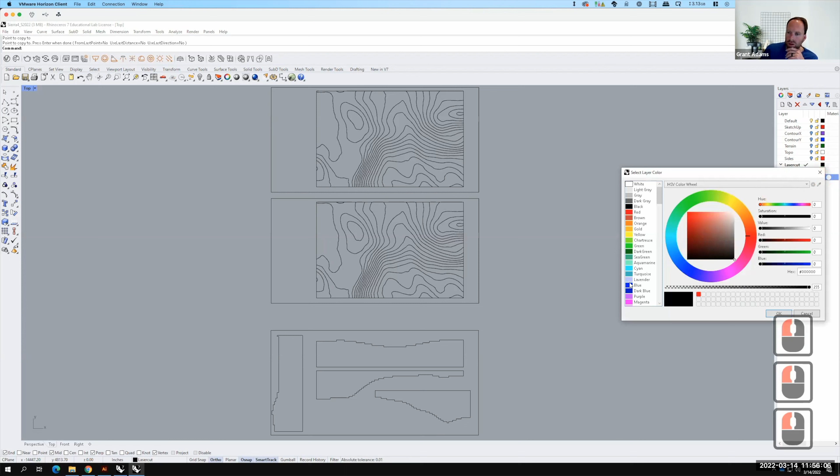The cut layer is going to be red, and the engrave layer is going to be blue. And those are specific colors; the laser cutter recognizes those colors. So I can then take the things I want cut out. So we'll take these four and we'll change them to be on the cut layer.

So we'll change objects. Likewise, the rectangular borders that go around these are going to be on the cut layer. Right click, change object layer. They're going to be on the cut layer. Now, when it comes to the topo lines themselves, we have to work our way through each one. And what we want is every other one of these to be red. So if I started here and then held down shift, we'd skip this one, we go to this one. Then we work our way down, we'd skip this and go here.

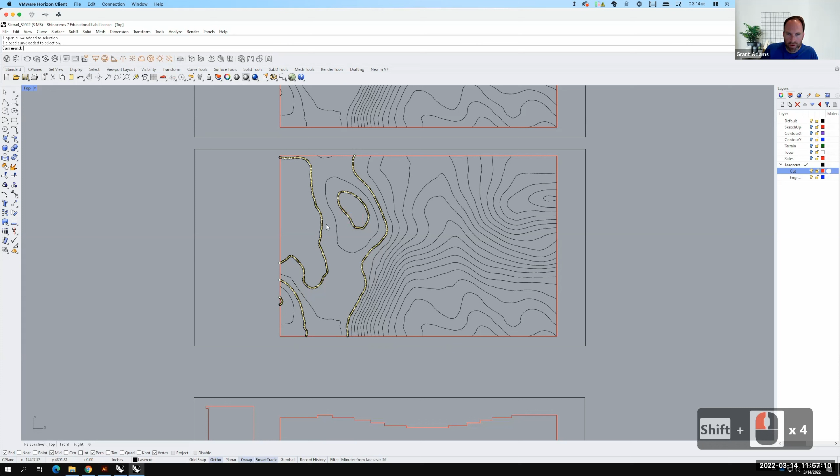Now this gets a little tricky because this level is the same as that level because it's across a valley. We skip one to here. This one, we don't know. It could be up, it could be down. We'd have to look more carefully. But as long as we're being consistent, we'll be okay. So I'm going to go through and pick every other one.

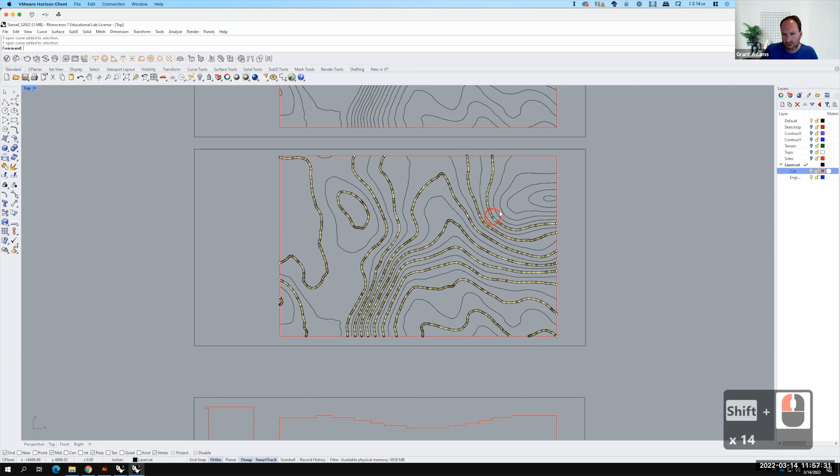And we'll work our way up here like that. And all of those are going to move onto the cut layer. So let me right click and say change object layer. So those are all going to be on the cut layer. Now in the one directly above here, I'm going to start with the opposite. So instead of picking this one to start, I'll pick this one. So we'll go there and there. It'll be this one. And the good news is you can kind of use the one below as reference.

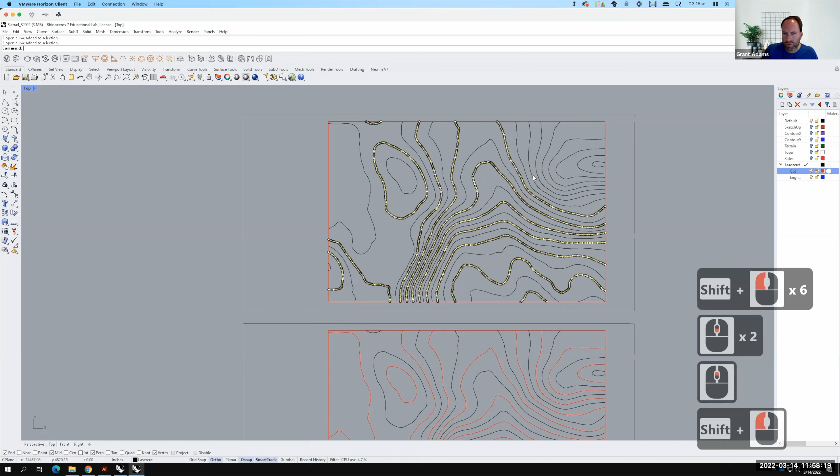And then we'll work our way up. And we'll work our way here. To there. And now all of these should be on that cut layer. So I'll right click and say change object layer. So they should be opposite each other. The rest of the pieces that I haven't selected, if I were to select them now, they can be put on the engrave layer. So I'll right click and say change object layer. And those would all be on the engrave layer.

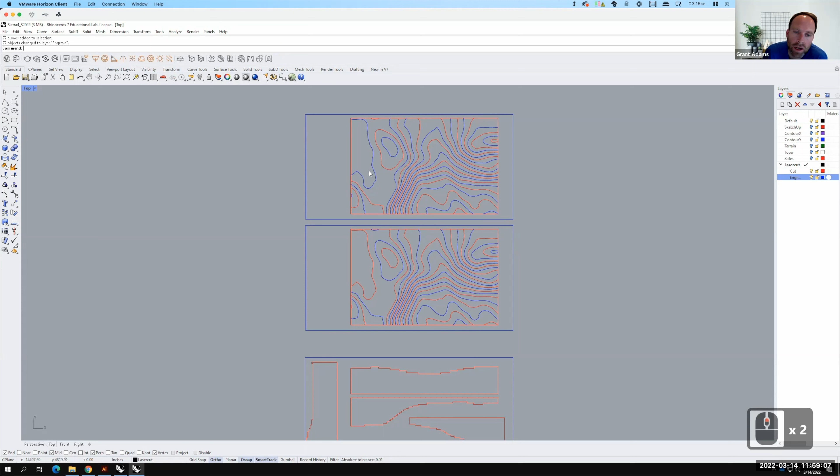So these are the files necessary to cut and assemble this model. If I were to go to the laser cutter room, if I had this file in an AutoCAD format, I could actually go ahead and cut it. And so what I'm looking for you guys is to actually show me a screenshot of these red and blue lines and also give me an AutoCAD file. So you're going to give me both. So the screenshot's easy. Let's zoom in a little bit so we can see it here. I'd go up to my down facing arrow. I'd go to capture to file, and I'd save this screenshot.

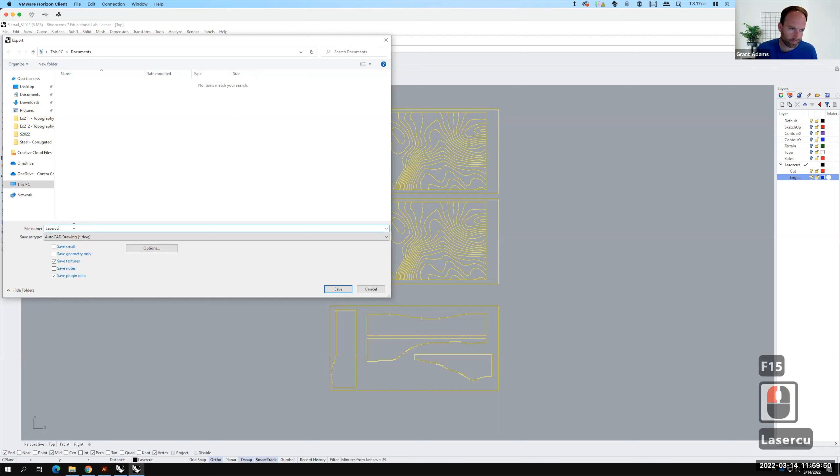For the AutoCAD, we'll select all of these. We'll go up to file and then export selected. And we're going to change the save as type from a Rhino 7 model to an AutoCAD DWG file. When I go ahead and click, I have to give it a name here. Call it Laser Cut Spring 2022. And under the export scheme, I'm going to use the 2007 polylines. And I'll go ahead and say OK. And that will then write the AutoCAD file for me, which is the other piece of what you're going to be turning in as part of this exercise and also part of your assignment 202.

OK, so I know that was a lot to take in today. There's a lot of kind of steps to this. I will process the lecture and I will post it. If you feel like my lecture isn't up and you need to go back and review something, you can always look at one of my lectures from a previous semester. Look for the 213, and it'll be essentially the same thing that I just went through today. So you can see it there as well.

I wish that we could make it so that we could all go in and do this laser cut. Like I said, the lab is open, so you could play around with it if you wanted to, but it's not part of the requirements for the class. You won't physically build this model. However, I want you to get to this phase where you could go to the laser cutter and actually cut it out.